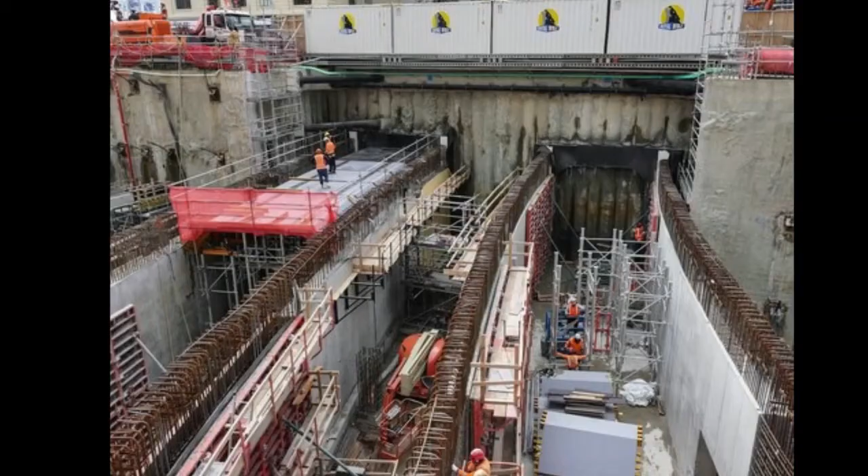Part of the challenge we have, which is actually a good problem to have, is KiwiRail is seeing a huge amount of investment, billions of dollars from government. So we're getting money coming through from the New Zealand Upgrade Program, Provincial Growth Fund, as well as the National Land Transport Fund.

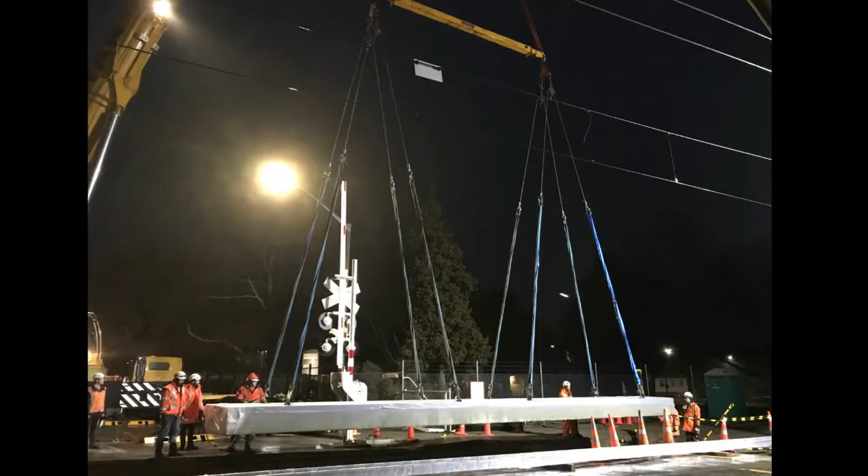The difference with rail is you can't just detour trains. Bus replacements are very costly and they're very disruptive for customers, including when we're bad neighbours trying to do work at night. Projects have to be very well managed to minimise disruption, so this includes night works, sometimes working on holiday periods like Easter, and sometimes this takes years of planning.

And clearly there's a strong demand for doing things a different way.

Using VR, we're managing to show what children are actually seeing through their eyes when they're going through a level crossing, which is quite a new experience for us. As you could see in that little short video, all they could really see was just the fence - really poor visibility of the train. That led to a bit of a rework of the design, which may have meant using some different type of fencing material.

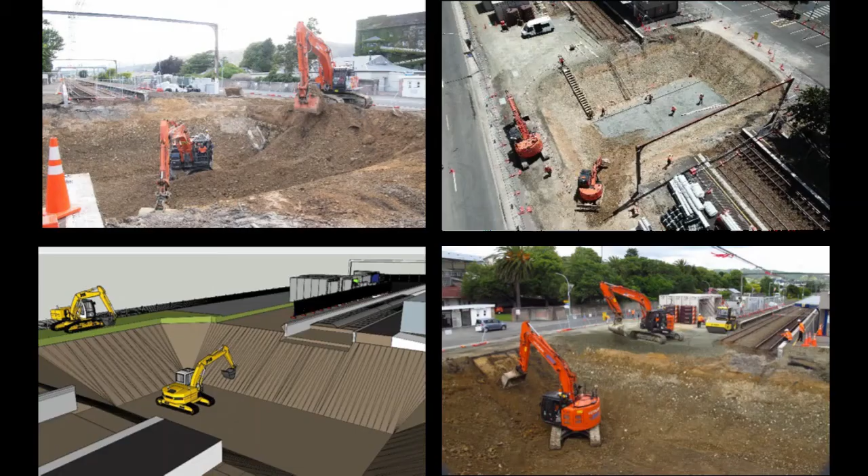So we have lots of hazards. Not only are there trains, but there's also risk of falling from heights. There's tunnels, which are confined spaces, overhead power lines, underground infrastructure. But we're a very safety-focused organisation - there's very little tolerance for error. Can you imagine the chaos on a Monday morning if there were no trains running?

This massive hole was excavated over a holiday period for a new underpass. They actually used machine GPS control, which made the whole process safer and much quicker because they didn't have to have anyone down in the hole surveying it as they go.

Rail has a lot of moving parts, real complex and crucial systems like signals. So we also have to manage our documents really well during a project, but also looking back on the project.

So the approach we took was just to get stuck in doing the BIM and learn quickly - adopted existing standards, jumped aboard, sit back and just enjoyed the roller coaster ride.

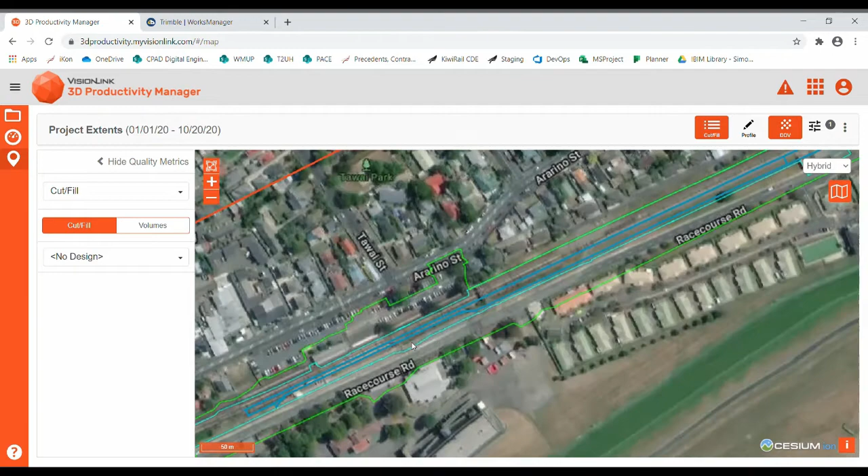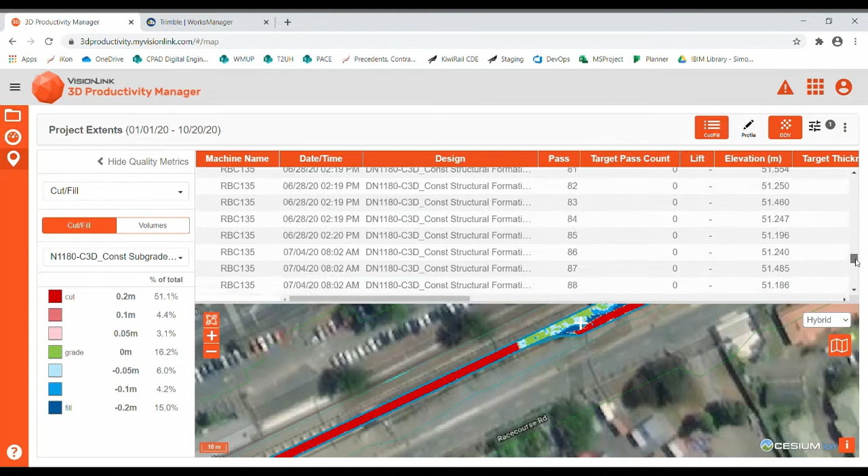Quickly found that linear infrastructure is quite challenging. There's a lot of tools out there designed for vertical assets like buildings, but we were fortunate to find support, or someone crazy enough to support us on this journey. So we worked with Aurecon to build a platform called GeoDocs, and also with Downer, who were early adopters in piloting the approach with our Trentham to Upper Hutt double tracking project.

GeoDocs pulls together existing KiwiRail systems - SharePoint, Azure, ArcGIS Online, Autodesk Forge - and it manages the information and workflows according to BIM ISO 19650. I'll go through some of these in a bit more detail.

The system allows internal and external users to have controlled access to a vast wealth of managed information and workflows within the web browser, so they didn't have to have any plugins installed or any specialist software. So I'll do a bit of a BIM overview.

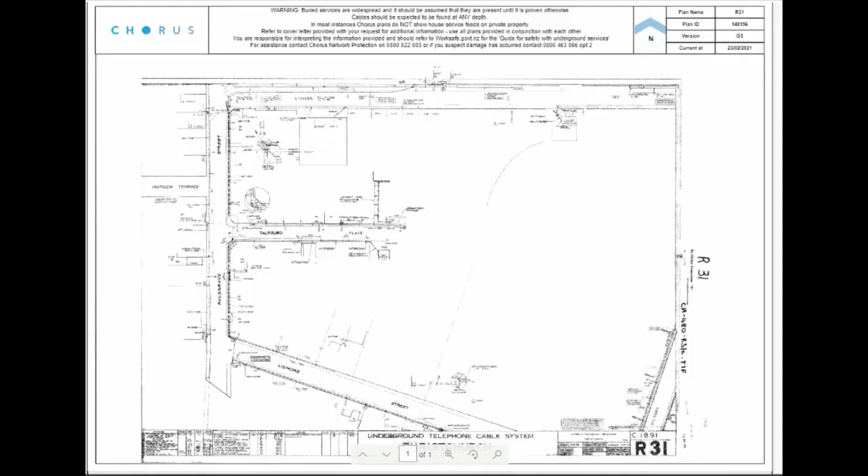BIM, I guess for me, one thing I learned pretty early on, is it's a lot more focus on the workflow from concept all the way through to as-built, asset data, and also perhaps a digital twin. It's really about reuse of information to reduce the rework and avoiding starting from scratch.

What we found is that it actually unlocks a lot of other benefits, like anything from community engagement to new ways of working.

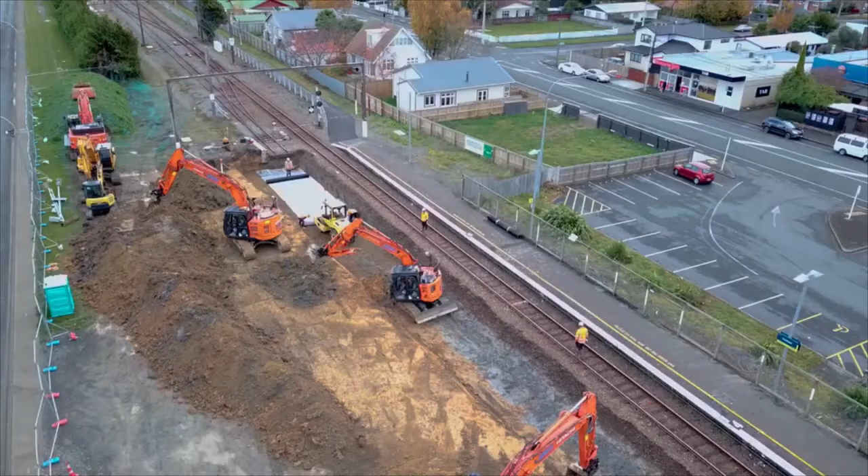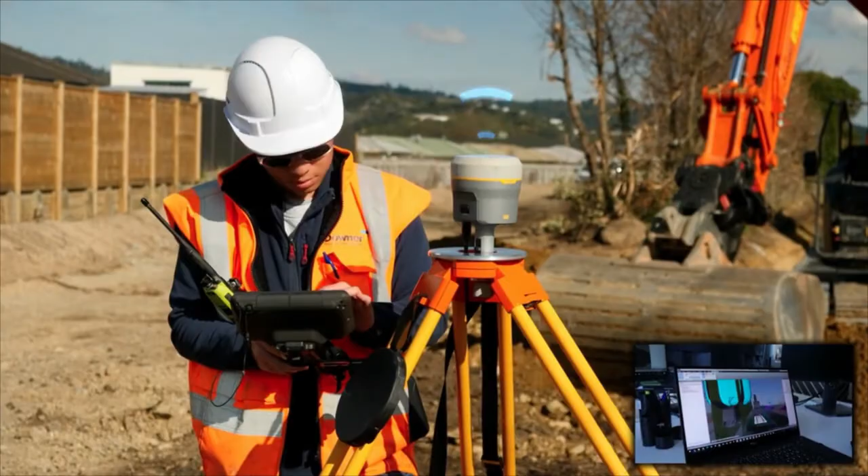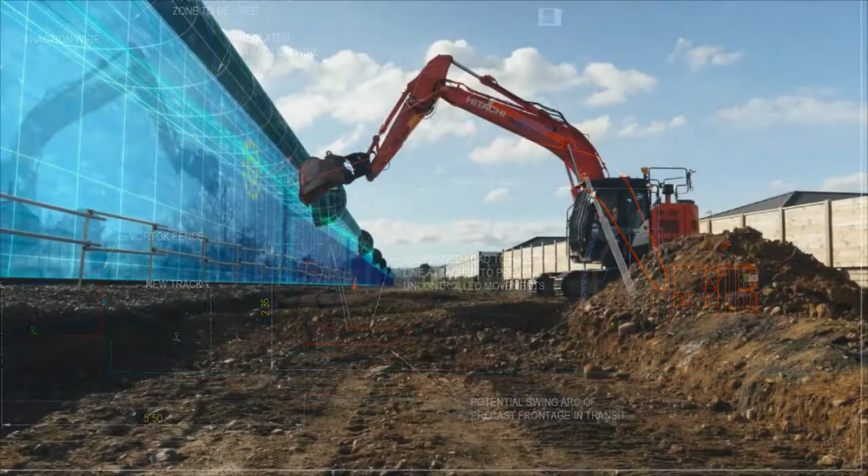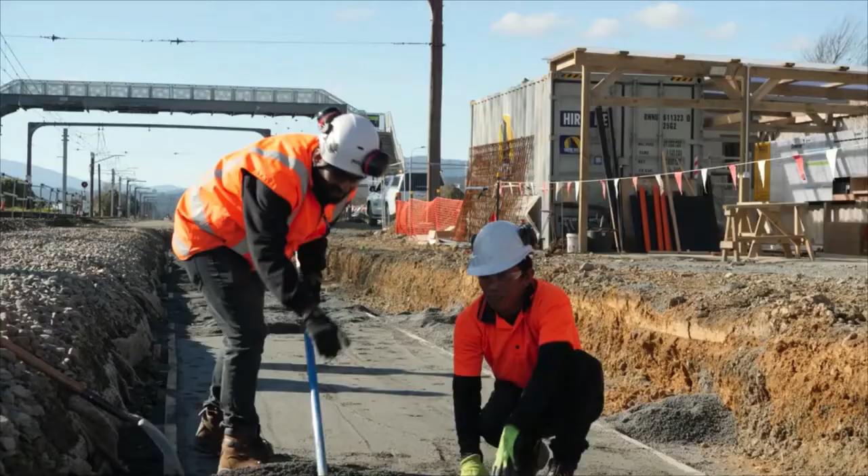But what we found was with the use of some clever technology, we're actually able to operate machinery within the live corridor. This made a huge difference to one of our projects, saving time and money, but also the impact on our customers while maintaining safety. We think that this is really exciting and a huge opportunity to transform our business as usual operations. What you can see in the video here is they're actually preventing the machines from contacting anything within the rail corridor, which means that they can carry on work.

Another key theme within BIM is collaboration, and that's throughout the project - we need a lot of collaboration. That's from sharing files, being able to access the right information at the right time, and I won't go too much into that.

But it's about being able to make an informed decision. I guess an example of that is clashes in a design - so underground services is the classic.

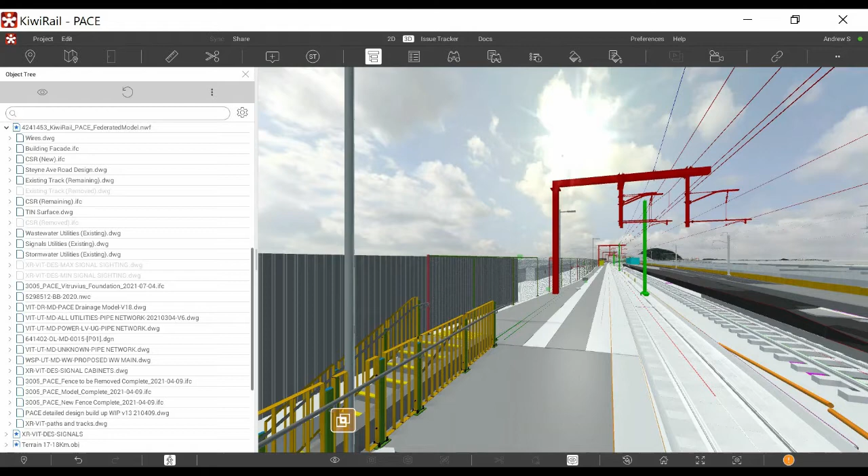So we need to ensure that we address all these issues and track them to ensure they're closed out. This is Revizto. In here you can flag issues and then assign those to someone, track it, and close it out. So they might end up redesigning it before we go out to construction. And it's really visual, an easy way to explain to people in 3D.

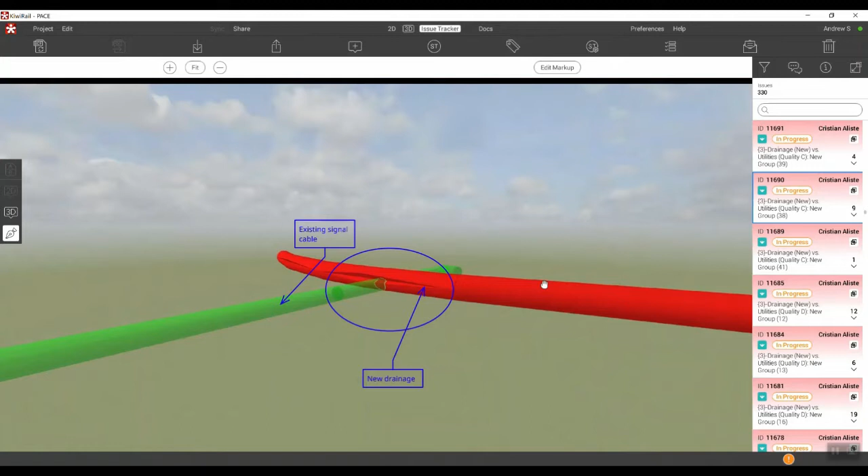We're finding this is probably the biggest growth area in terms of interest in our team at the moment. In contrast, doing this the old way with 2D plans, there's a high risk of missing something, which would lead to a lot of surprises out on site. Your digger operator finds a pipe in the way, they go back to the drawing board, and you end up with a contract variation, which costs money, and there's delays. We just can't afford it.

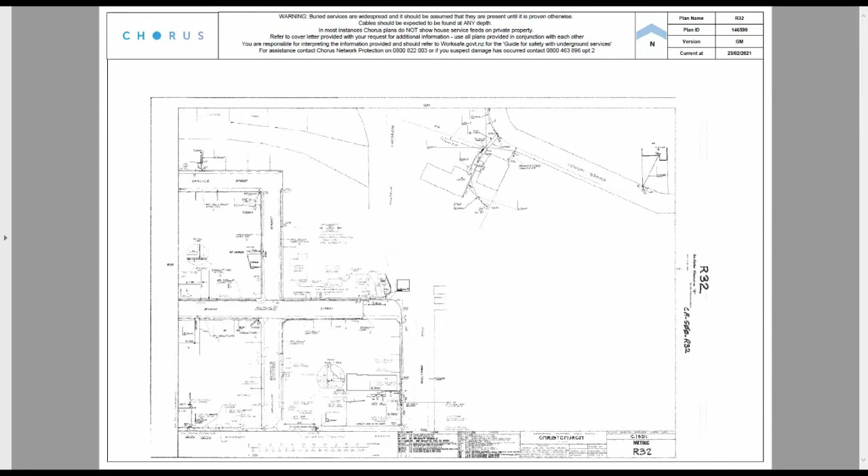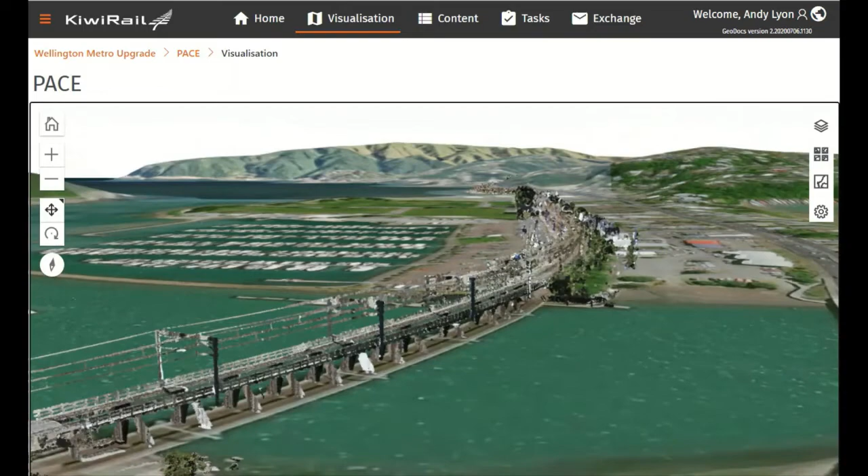So where does ArcGIS fall into all of this, I hear you asking? In the video, you can see this is a point cloud scan for the PACE project, which is allowing for more trains on the Kapiti Line. Really, this is just about visualizing and democratizing information for all users to see.

So within each project, there's a dedicated ArcGIS Online visualization for 3D models and point clouds. And this really just allows anyone in the project to go in and visualize the current and future states of the rail corridor. So they can take measurements and see the project in context with the surrounding geography. I'm sure plenty of you understand what I mean.

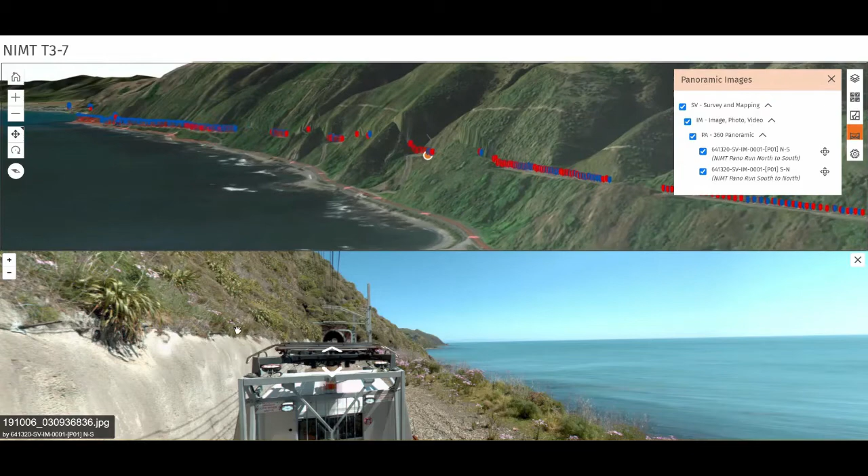So the point cloud scan of the network is probably our default starting point for a project. We also have a panoramic imagery tool, which is really handy for reducing site visits, which are really heavily restricted in a rail corridor.

Each user has an ArcGIS Online license. They authenticate using their Windows account with a single click. The next video is showing the as-built information under the tracks as it's being constructed.

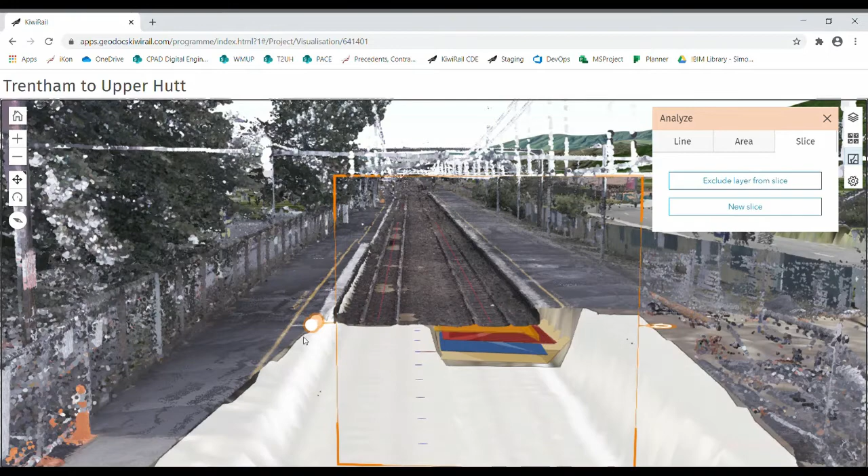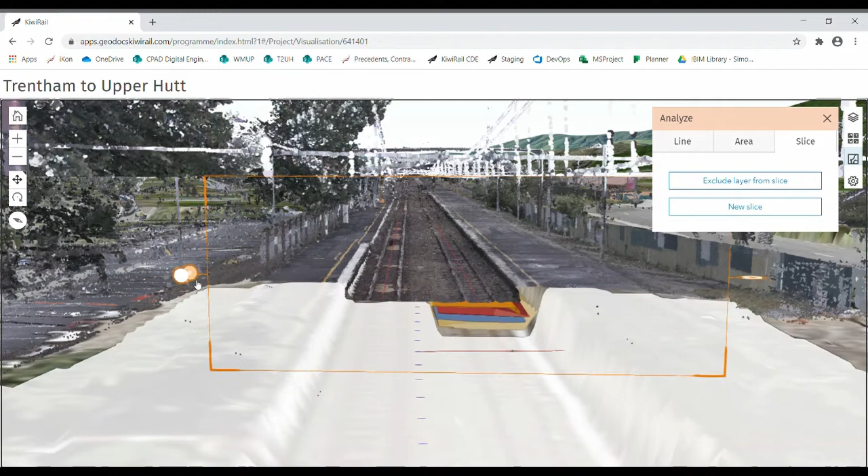The information's captured from the excavators as they go. We get monthly uploads to GeoDocs as part of the contractor's claim process. So under the hood, GeoDocs is reading a web scene from ArcGIS Online, and all the content is hosted in ArcGIS Online. And currently it's a bit of a manual process to get point clouds in there using FME.

And then I upload using ArcGIS Pro as a point cloud scene layer package. I've put a handful of 3D buildings in there, but I found that generally the level of detail is too high for ArcGIS Online, and there's no easy way so far of removing the internal walls.

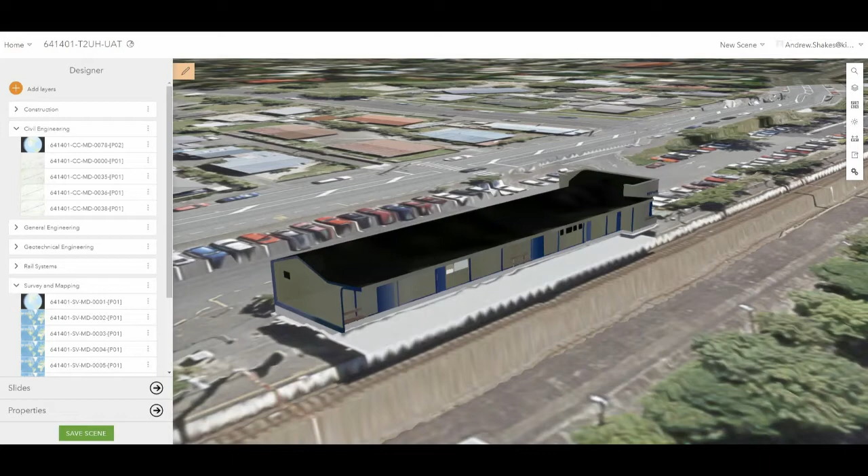So in future we might look at setting some standards to make that easier for us, maybe using layers within the Revit files or tags to be able to filter it out.

I found the terrain model for ArcGIS Online was a bit problematic at first. The best solution I found was to create terrain models for each project using FME and then share it using ArcGIS Pro.

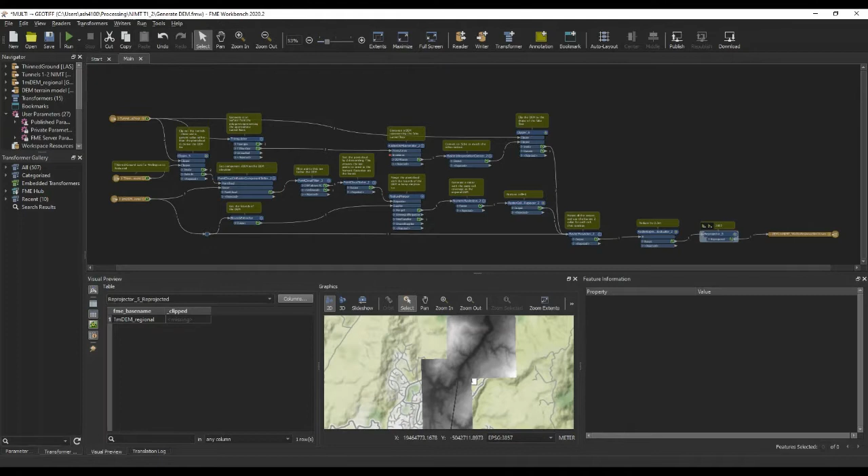So I'm taking the lowest values from the point cloud and then combining that with a 1 meter digital elevation model from LINZ data service to create a 1 meter DEM and then cache that up and put it in ArcGIS Online. And so I filled trenching, tunnels and excavations to prevent you needing to navigate underground, which was a bit problematic to begin with, but I know ESRI have made some big improvements on underground navigation.

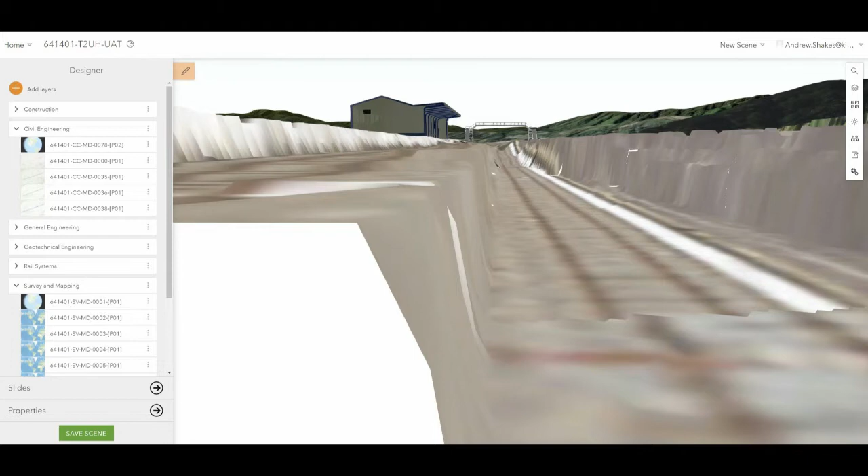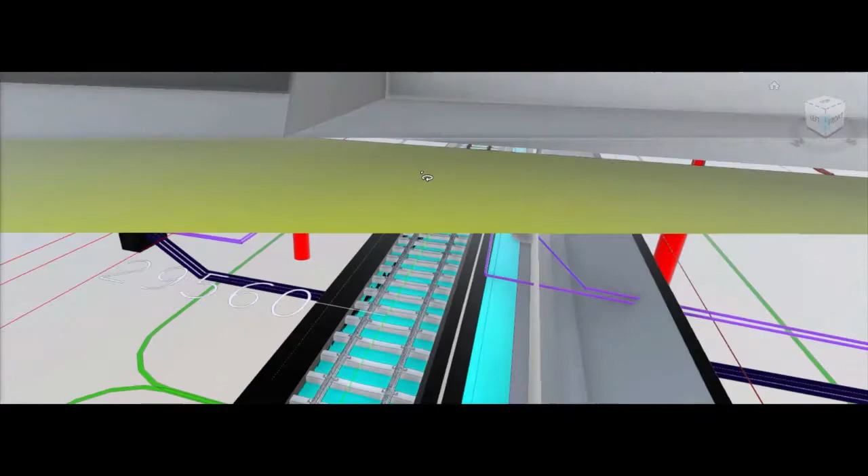So Autodesk Forge, for those of you that aren't familiar with it, allows you to visualize lots of different types of native models in a browser. And that's what ESRI have teamed up with Autodesk to enable GeoBIM, which we're really excited about seeing. Within GeoDocs, a user can click on a file and preview it using the Forge viewer within their browser without needing any plugins or any software installed.

So FME can read most formats that we're frequently using. Some of them need converting to a friendly format first, like Navisworks federated models. Can't be read directly, but you can convert parts of it to like DWF.

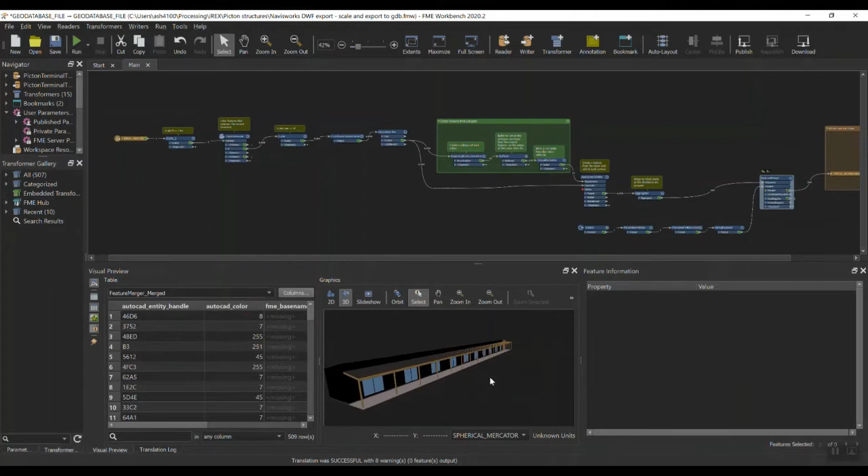For ESRI, I'm typically writing to File Geodatabase multi-patch format for the 3D models, and then I use ArcGIS to cache it and share it. LAS seems to be the most ESRI friendly format for caching and sharing point clouds without filling up my hard drive too quickly. Although Revizto and Recap prefer LAZ.

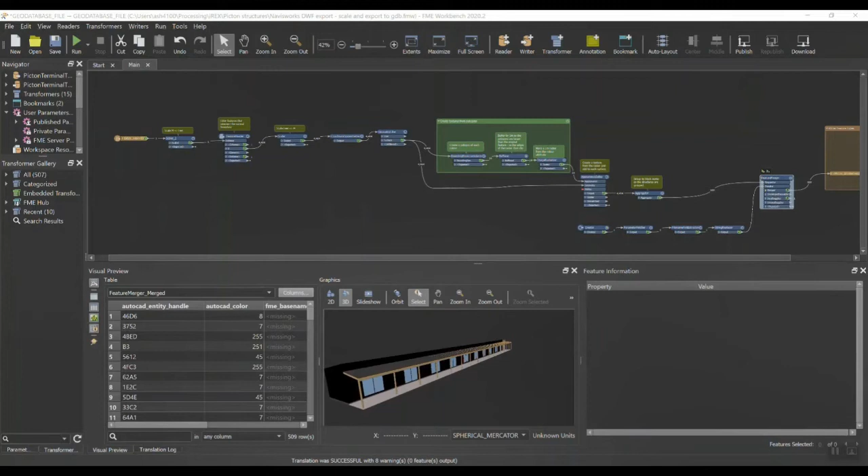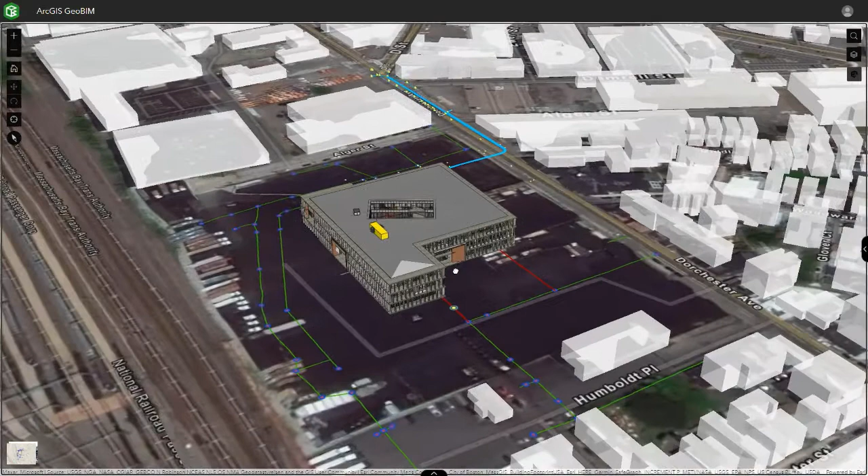So in terms of next steps, our team's expanded, so we're now rolling out this BIM kind of approach on all of our capital projects. We've got a big uptake in Auckland. There's a lot of activity out there, especially driven around the city rail link. We've got new ferry terminals in Picton and Wellington to accommodate the new ferries in 2024. There's some traditional BIM elements to that, but with the mix of rail and maritime in there as well.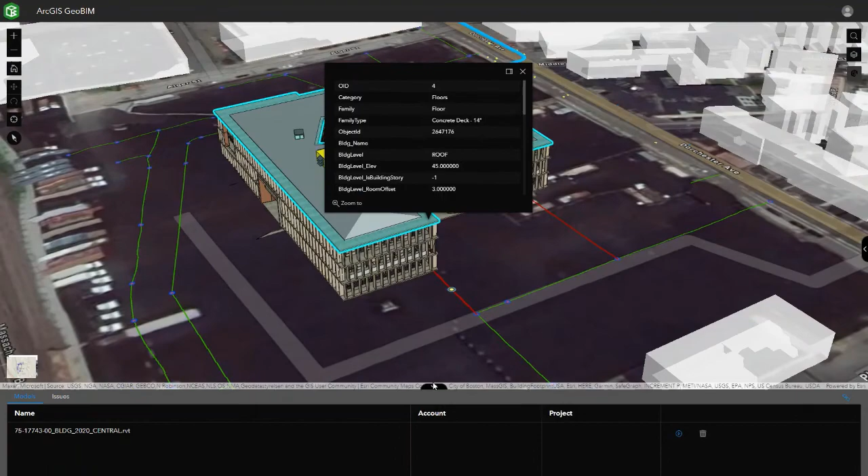There's huge potential to transform our business as usual kind of operations. This is going to be a bit of a slow burn. We need the business to somehow update the model as assets are renewed and maintained and replaced. We're really keen to explore this ArcGIS GeoBIM, which is the Forge viewer within the web scene.